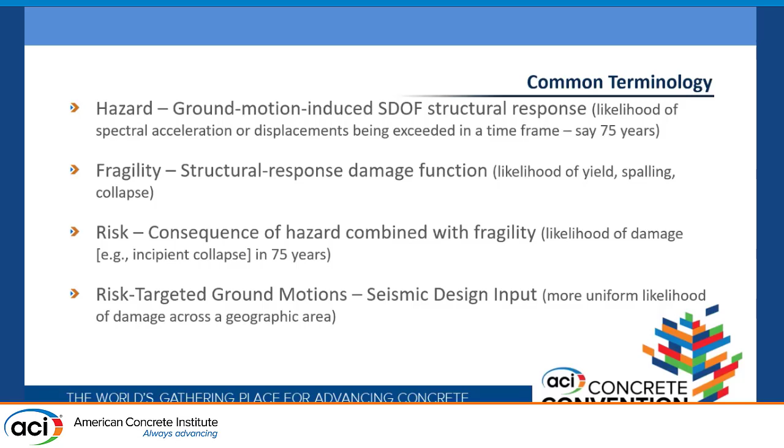So the motivation for this: first, in AASHTO, we adopted new displacement-based design guidelines in 2007, and at that time, the best map we had from USGS was the 2002 hazard map, and that has stayed the basis of AASHTO for many years. It's time to update. There have been a lot of improvements that USGS has done in terms of looking at seismic sources. Mervyn just mentioned this earthquake in North Carolina. Historically, one of the great ways you got on the earthquake design map was to have an earthquake. So I'll bet that USGS is changing some of what they're doing in that North Carolina, South Carolina, Virginia area.

And then there were new attenuation relationships. An attenuation relationship is what happens from where the earthquake happens to where your site is located. How does that motion propagate through the Earth's crust to get to your site? There's been a lot of work done to improve those relationships. And in this case, in the central and eastern U.S., they've changed motions dramatically, in fact, reduced them, which is a good thing.

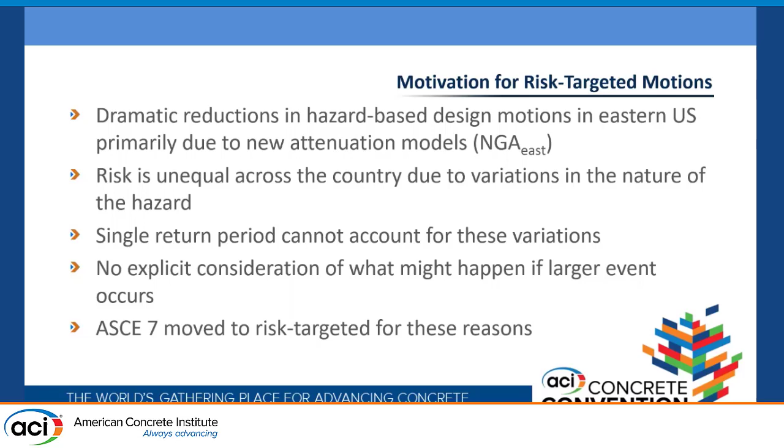And then, as I mentioned, the building side, ASCE 7, had moved to risk targeting for these same reasons.

So if we look at response spectra, and I apologize, I've got some graphs. I know it's 8 o'clock in the morning. Well, you're all engineers, so hopefully you'll hang with me with the graphics here.

So this is for Los Angeles, so it's a West Coast site. And you can see, see if I can get the laser screen. So here you can see the dashed lines are the existing 2002 AASHTO uniform hazard, these very simplistic response spectra. And then in the new 2018, this is what we're moving to in terms of the basis for hazard from U.S. Geological Survey, is the solid line.

So you can see this variation by 1 over T; this is the spectral acceleration versus period plot. You see how we've got increased motions in this range of about 1 to 3 seconds. Well, we have a lot of bridges in the 1 to 3 second range, so this is an important change. And this has happened for various site classes. So over here we see B, C, D, and E are different site classes, going from B, relatively firm, to E, relatively loose soil.

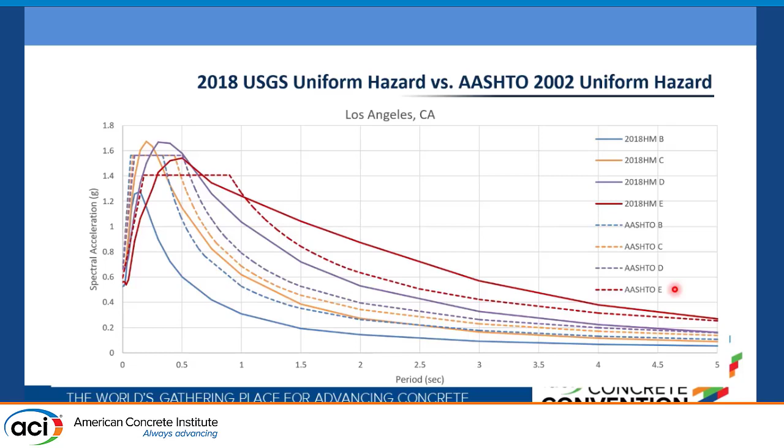And when we look at the same thing for Charleston, South Carolina, now we're in the eastern U.S. site, see the existing 2002 hazard at the 1,000-year design ground motion. And now you see for site class E, for example, quite a drop. The solid line is the new 2018 ground motion. If we look at a D site, that's the purple. Here's the 2002, and a bit of a drop there relative to the earlier ground motion. So these differences now we need to address.

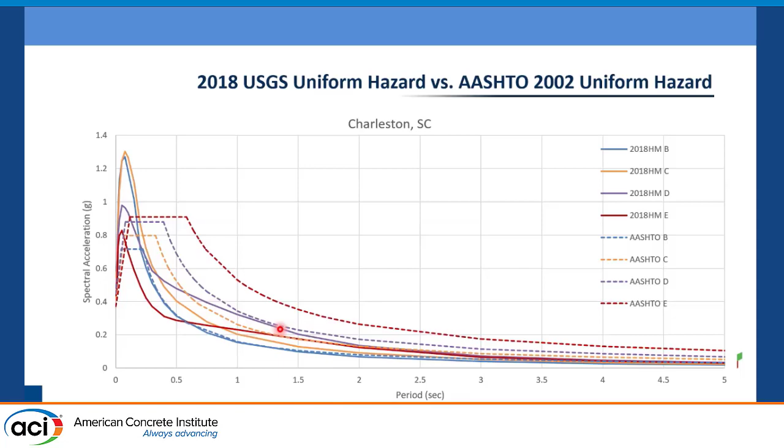And so let me show you something else that's behind this. You could kind of fish it out of those curves; this shows it more directly. If we look at the probability of exceedance in 75 years on the ordinate, and the ground motion acceleration on the x-axis, we've picked 2 cities, Portland, Oregon, on the west coast, and Charleston on the east coast, and at the design ground motion, 7% in 75 years, or 1,000-year return period, they have exactly the same spectral acceleration at 1 second, which would be what sets the design requirements.

But then if you look at more rare earthquakes, say at 3%, now you see Charleston has a much higher acceleration, maybe about 0.45 g, versus Portland, which is about 0.35 g. You see quite an increase here in the east, and this is characteristic of the east, that as you go to longer return periods, you see much higher accelerations than you do at the 1,000-year ground motion. And we've known this for years.

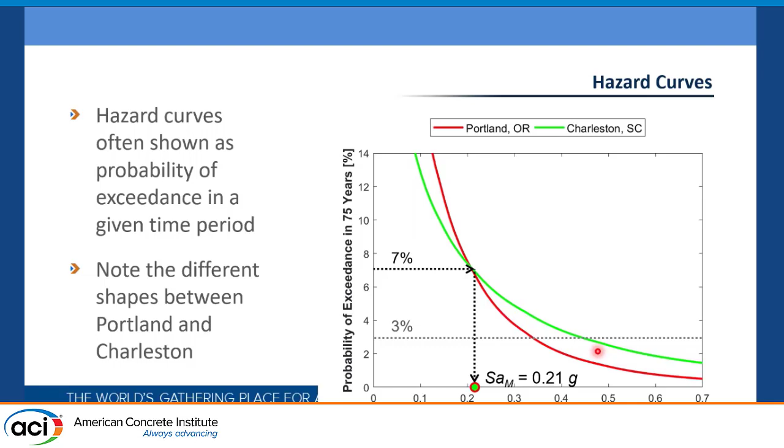We originally designed for 500 years, and the 2,500-year earthquake in Charleston, for example, is about 6 times as large in terms of spectral acceleration as the 500-year motion. It's a little less for the 1,000, but still quite a difference. So this characteristic difference is one of the main reasons why we're moving to risk-targeted ground motions. And historic earthquakes in the U.S., 1886 in South Carolina, 1811, 1812 in the New Madrid area, were much larger than the 1,000-year design event in those areas.

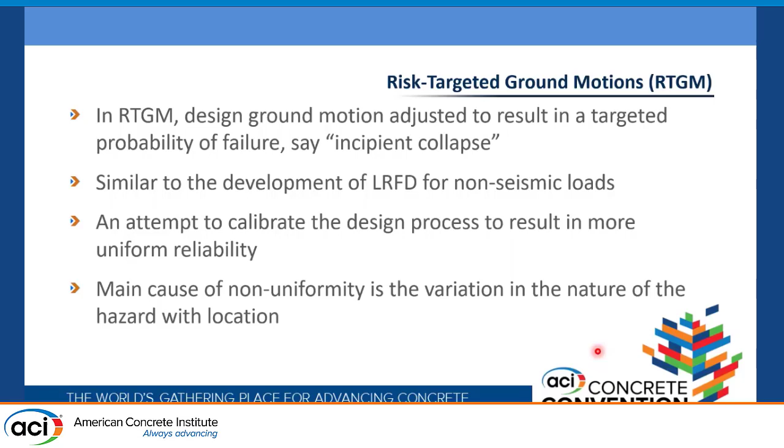So in risk targeting, what we're trying to do is adjust to say we have a similar probability of failure, in this case, incipient collapse. Haven't collapsed yet, but we're right at the threshold of it, probabilistically. And this is similar to the development of LRFD for the design codes for gravity loads. It's an attempt to bring the design process into more uniform reliability across the country instead of using one return period. This non-uniformity is the main reason we're moving to risk targeting.

Now, to do this, we need to use, again, what I call the fragility function. And so, just like we use a notional truck, not an actual truck, for design, we're going to use a notional fragility function.

And we're going to use one fragility function for the entire country. A lot of people have really gotten wrapped around the axle with this, but it's simply a first step to try to put everything on a similar basis in terms of risk versus hazard. And so the fragility function looks like this graph shown to the right here, where we have a probability of incipient collapse and then spectral acceleration. You could use spectral displacement as well. And this is a cumulative curve, and there are only 2 points that are required.

The conditional probability of collapse at the design point, which is where we're doing our design work, and that's taken as 5%. And then the log normal distribution with a standard deviation of 0.6, which sets the shape of the curve. And this has been calibrated back to some ACI work that's been done on column collapse from a number of years ago. And so what we're trying to do then is set this curve up so that we adjust it so that we get a consistent probability of collapse in our design.

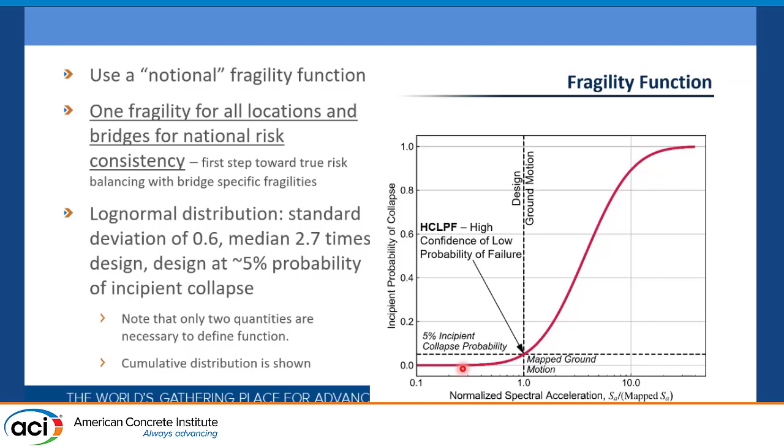And one thing you will note here is that 5% at the map ground motion doesn't mean that you'll have no collapse at the design point. There's a small probability you could have collapse there.

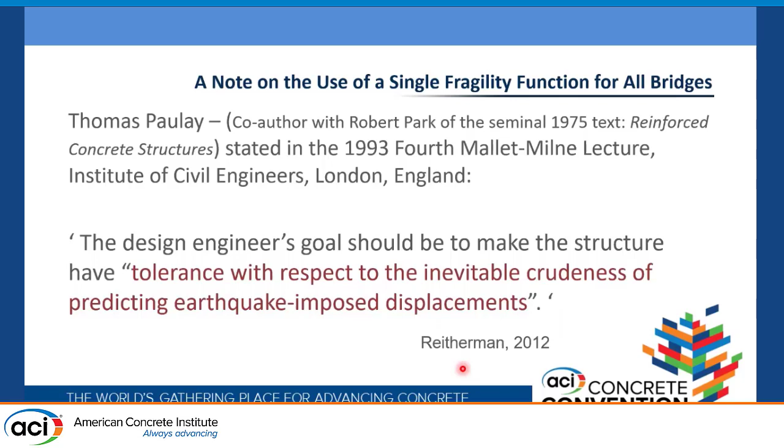All this said, mathematically, I want to take a step back and look at a quote from Tom Paulay, who co-authored a book with Bob Park in 1975, one of the best reinforced concrete structures books ever written. And in his 1993 Mallet-Milne lecture in London, he said the design engineer's goal should be to make the structure have tolerance with respect to the inevitable crudeness of predicting earthquake-imposed displacement. I want you to focus on that inevitable crudeness. This is not an exact science. And so we do a lot of things very precisely with numbers, but we should remember that it's not as precise on the ground as you might think it is on a piece of paper.

Now, again, it's 8 o'clock in the morning. I'm showing you an integral. I apologize.

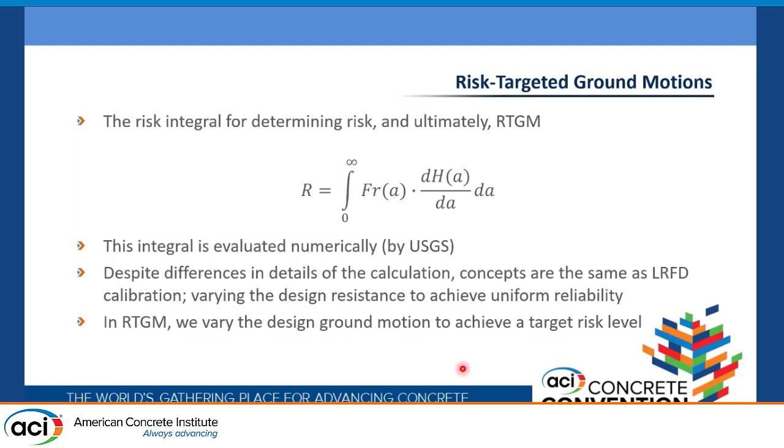The point here is we have to combine fragility and hazard. We do this with this integral. You don't have to worry about it because USGS does this for you. And if you develop a site-specific hazard response spectra, they have a tool online that can integrate your hazard so you don't have to do this. This is very similar to LRFD, which you probably have all heard of. And there you're not doing this integration either, but that's what's under the hood. So the important thing is that with risk targeting, we vary the ground motion to achieve a target risk level, incipient probability of collapse. Now let's look at this back with the Portland-Charleston comparison.

So if we actually perform the integration, and this shows area under the curve. It's not the area under this curve, we're just showing that to distinguish the two integrations. But if we took straight away this integration with a constant fragility with the two hazards, we find that in Portland, the risk of collapse in 75 years would be about 2.8%. In Charleston, it would be 3.5%. So they're not the same. This illustrates the difference between the East and the West in this regard.

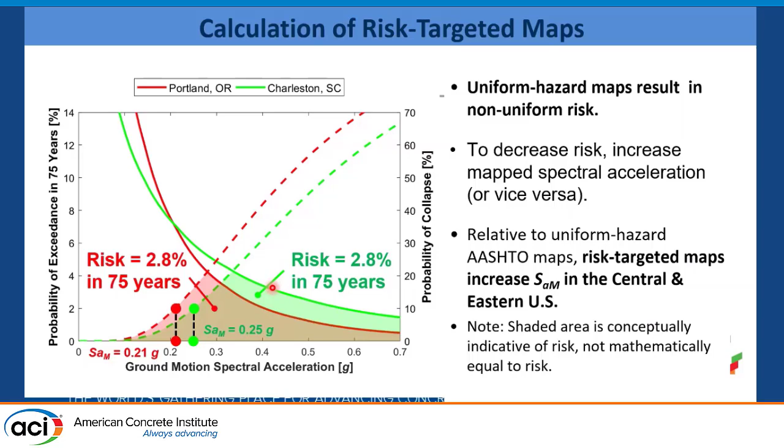Now, if we wanted to make them equal at 2.8%, just as an example here, we've got to increase the design acceleration for Charleston up to about 0.25 G from about 0.21 G. So it's not a huge increase for this particular case, but that's what has to happen in order to get the, quote, risk equal between the two sites.

Now, what the group has selected as the target risk is 1.5% probability of collapse in 75 years. And for this calculation, we're looking at now 22 points for a response spectrum. Each point has this integration done for it. Again, why you should thank USGS and your federal dollars for paying for this integration so you don't have to do it. This example just shows the 1 second period in terms of spectral displacement.

And for Memphis, which is in the New Madrid seismic zone in mid-America, we had to increase the design acceleration by 22% here to get the risk in Memphis to 1.5%. So we're going from a 1,000-year return period, we had to increase by 22% at this particular period to get to a target incipient probability of collapse of 1.5%.

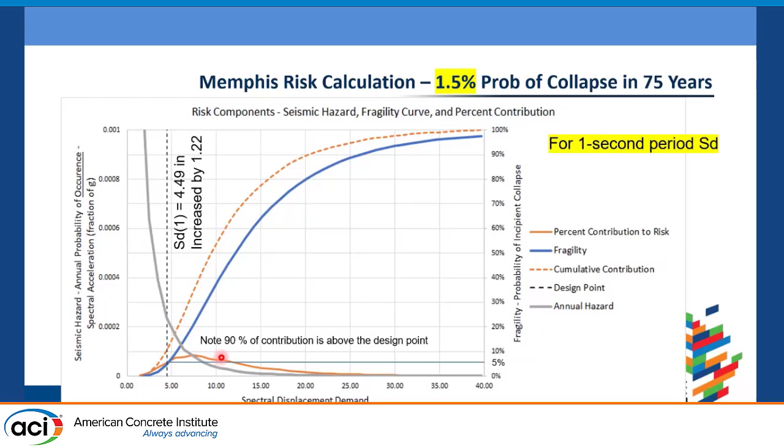And then one other thing I'll draw your attention to. The curves here are the same as before, the hazard and then the fragility, and then the yellow or orange curves are the actual contributions to the probability of collapse, and then the cumulative. And what I want you to see is that over 90% of the contribution is above the design point. So if you're designing something, you don't want to just get to your target ground motion and then have everything break and come apart. You need some tolerance for the uncertainty of the design displacements that Tom Paulay talked about.

So in summary, the AASHTO seismic provisions that have now been adopted and are being used: maps are not included. Maps for 22 points would just inundate you with paper, and nobody's really doing this anyway now. It's all numerical. You go to a database, you get this stuff, you put it in a spreadsheet or whatever program you're using.

And then they have also included additional site classes. So we had A, B, C, D, and E. F is a special site. They've now included halfway in between those, so a BC, a CD, a DE. Those are helpful in terms of site characterization. And then we only have shear wave velocity.

So if you're using standard blow counts, standard penetration test, for your site characterization, you need to adjust those to shear wave velocity. Because of the 22 points, you'll need new methods for calculating the corner periods. When you're going through the design code, there's a provision for that. And there's an appendix added to the guide specifications for seismic design that goes through a lot of background information similar to what I'm giving you today.

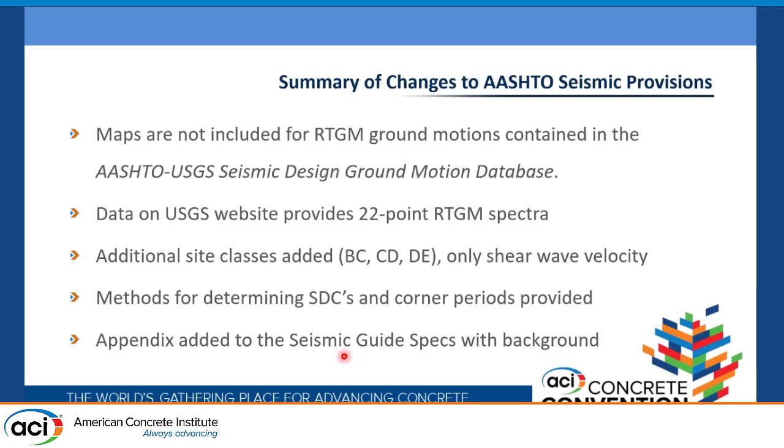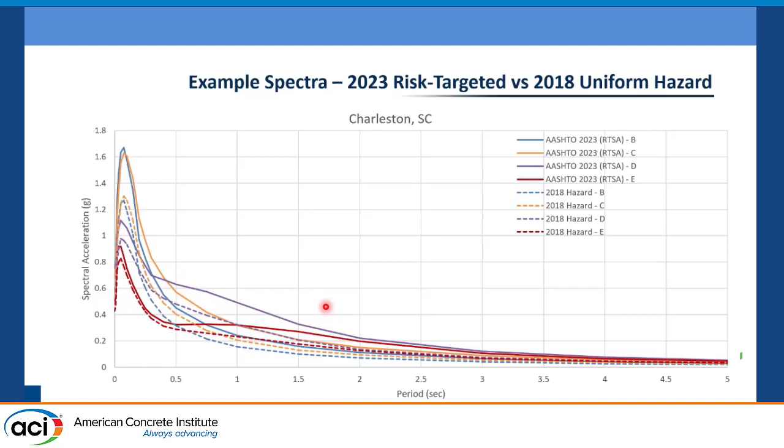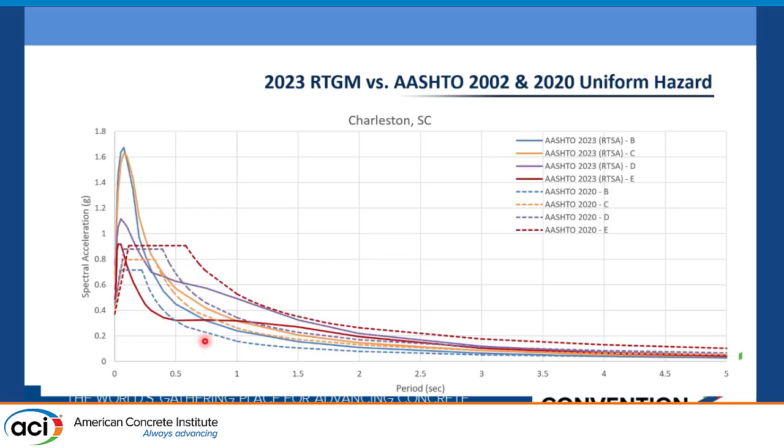If we look at this relative to the 2002 map, which AASHTO had been using up through 2020, the 2020, same as 2002, values are given by these dashed lines. You see quite a bit of drop here for several of the poorer sites, and actually a little bit of increase for sites B and C, again in Charleston.

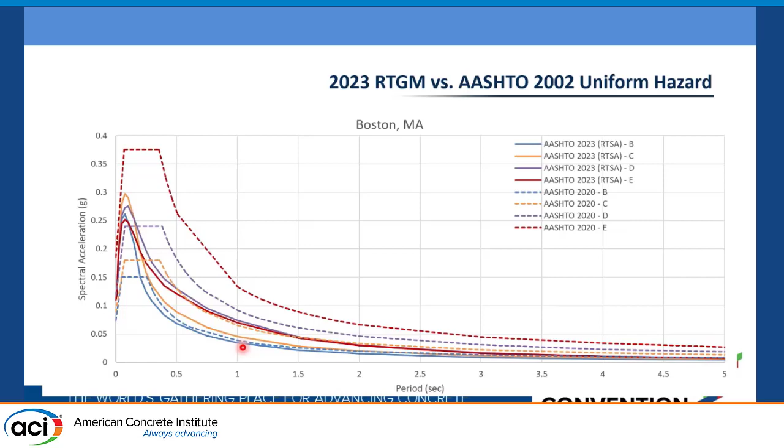One of the things that might be occurring to you is, what does this do with regard to return period? So if we look at return period on the vertical axis and spectral period of those 22 points on the horizontal, this is a class DE boundary site and then a class E site. The colors: red is the western U.S., blue is the Intermountain West, basically the Rocky Mountains, and green is the central and eastern U.S.

For the most part, in the west things stay right around or just above 1,000. You see these two lines take off very steeply in the west. Those are Seattle and Portland, which are in the Cascadia subduction zone. Long period motions in subduction zones are important, and you see that here with the increase in the effective return period each of these points is being designed for.

But if we look at the green, in the east, for both of these, many of the sites are moved up into the 1,400 to 1,500 year range, which is appropriate because longer return period earthquakes, say 2,500 year earthquakes in the east, are much larger than the 1,000 year. In fact, as Ty Stokes will talk about later, in South Carolina they're already using the 2,500 year earthquake.

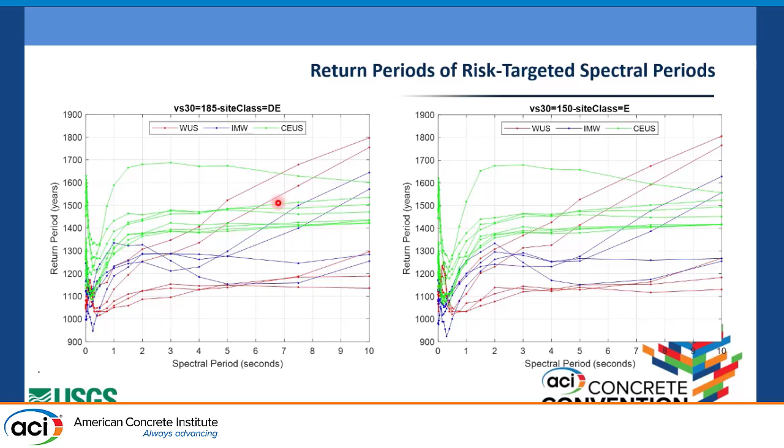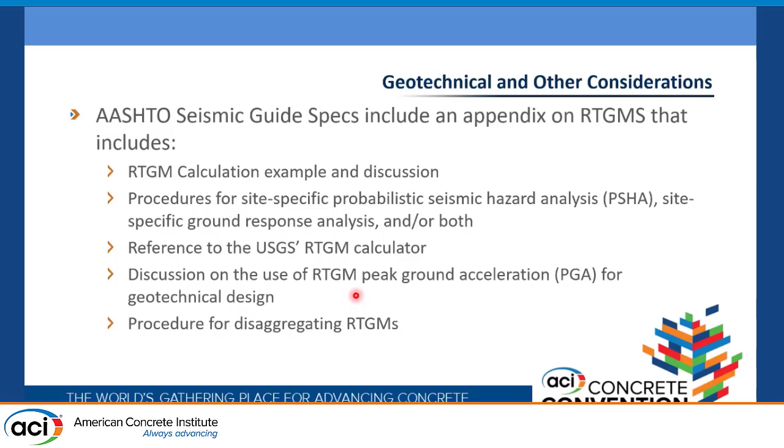So I've just got two slides here to wrap up. In the guide specifications, there's an appendix that provides a lot of information on how this calculation is done, what it means, references to the USGS, that sort of thing. We don't need to go into all the geotechnical specifics today, but there's information there for you geotechnically.